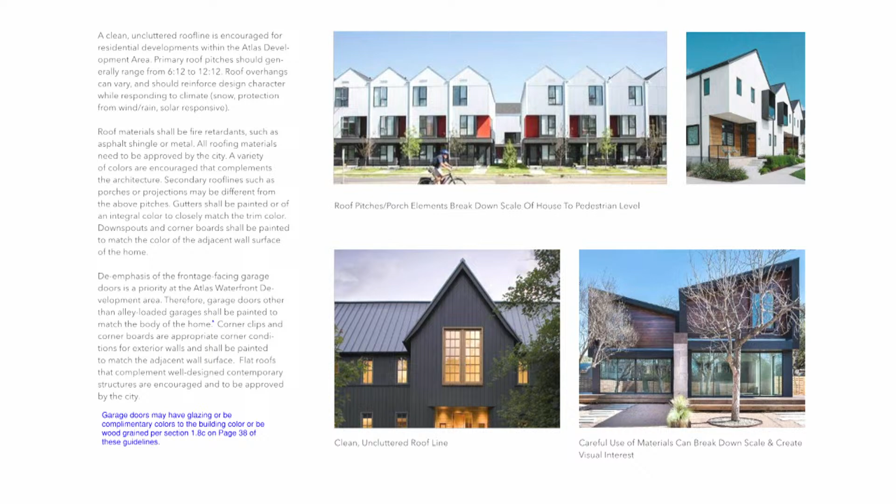On the screen you will see in blue text the suggested modifications to the design guidelines. The first slide, at the bottom left, says garage doors may have glazing or be complementary colors to the building color or be wood grain per section 1.8C on page 38 of these guidelines. The second slide in blue shows the additions: therefore, garage doors other than alley-loaded garage doors shall be painted to match the body of the home, or painted an approved complementary color, or be a wood grain as approved by the ADRC. And finally, garage doors with windows are subject to ADRC approval; windows shall be less than 25% of the surface area of the garage door. So those are the modifications that are suggested.

Everybody agrees with those. They think it will add value to the overall project if those variances are included. Happy to answer any questions you have.

Seeing no questions... one quick question: will this change apply to all the rest of the developments in the district, or only the ones who currently requested this? It applies to the entire Atlas project area. Thanks. Any other questions, comments?

Need a motion? Yes. I would move to approve the modification to the architectural design guidelines as presented to us this evening. Second. Moved and seconded. Any discussion? All in favor? Aye. Any opposed? Thank you. That motion carries. Thank you, Mr. Chairman.

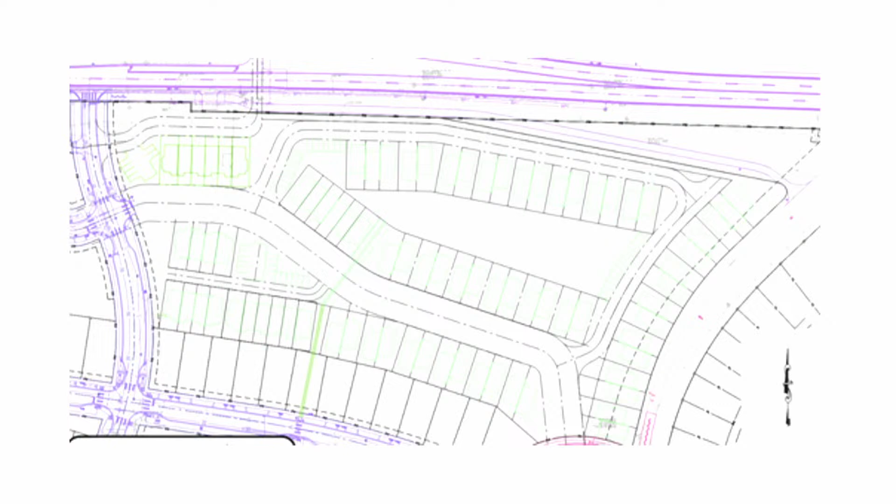After evaluating the different options, it was determined that the Atlas Road borrow backhaul site was the preferred option. Ignite asked the city to allow Ignite to borrow 75,000 cubic yards of structural soils from the city parcel and to backhaul about 60,000 cubic yards of non-structural phase 3 materials to fill in the excavation created by the structural soil haul-off. As part of the Ignite City ITD partnership on this project, Ignite's contractor would finish grade the site to ITD's desired swale configuration.

Following additional work with the city and ITD on this proposed initiative, the quantity of borrowed structural fill from the Atlas site has decreased to approximately 64,000 cubic yards, and the backhaul of non-structural fill material from the phase 3 site has decreased to approximately 20,000 cubic yards.

That's a huge drop in what we can take to the Atlas site now, thus necessitating a strategy of blending some portions of the phase 3 materials with the Atlas Road borrowed structural fill materials to produce structural fill materials on the phase 3 site. So we'll bring in some of the good stuff, we'll kind of mix it with some of the better bad stuff to create buildable materials on the site.

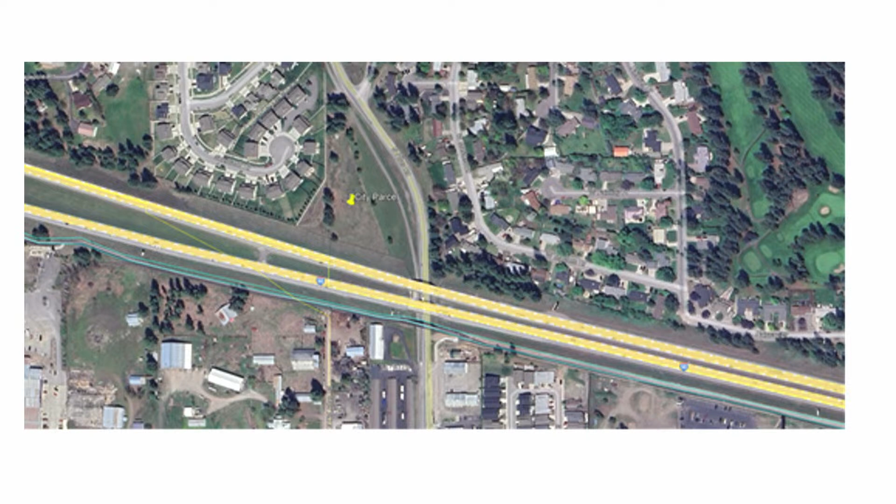Mr. Boyd will share in more detail about how that will work later.

Working with Welch-Comer, Ignite evaluated options for either bidding out this borrow backhaul project or negotiating a change order to La Riviere's existing Atlas project contract. Bidding the project out would allow Ignite to receive definitive construction market pricing, but would require detailed engineering bid documents and a longer project schedule.

Even though negotiating a change order with Lariviere does not directly confirm market rates, it does require only permit-level engineering documents and can be completed in a shorter time frame.

The proposed negotiated Atlas Road borrow backhaul contract with Lariviere has resulted in a total cost of $16 per cubic yard, which includes a material blending strategy and all pertinent costs like traffic control. This initiative is still very cost-effective for Ignite, since buying structural fill in the open market and placing compacted on the site would cost in the $30 cubic yard range. So $16 versus $30 per yard.

The following table on the screen summarizes the two options. You can see the bid item here, and then comparing if you bid it out versus a change order with Lariviere.

You can go down and see the different time frames, estimated construction time periods, the cost for design, construction documents, bidding, negotiation phase, construction phase services, and construction costs. There's a range there because that's just about the best the Welch-Comer team could come up with for what it would cost on the open market. And you can see the estimated costs there.

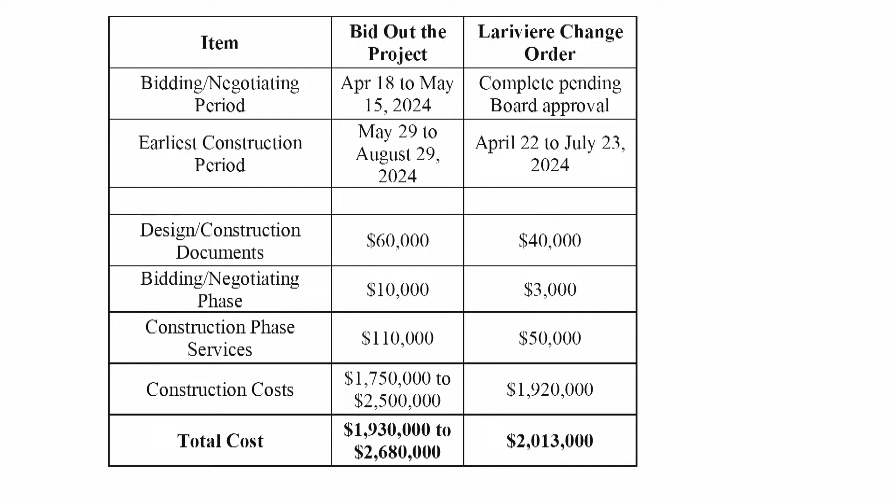Should the board elect to move forward with the Atlas Road Borrow Backhaul Initiative as proposed, a change order number 6 would be needed to the La Riviere Atlas project contract. La Riviere would be given a notice to proceed on April 22nd with a substantial completion date of July 2024.

So the La Riviere change order number 6, CO number 6, equates to about $1.9 million. You can see on the screen it involves hauling approximately 64,000 cubic yards of structural soils from the Atlas Road borrow site to the Phase 3 site, backhauling approximately 20,000 cubic yards of non-structural Phase 3 soils to the Atlas Road site, blending approximately 30,000 cubic yards of Phase 3 non-structural soils with Atlas structural soils, and remediating 10,000 cubic yards of Phase 3 unconsolidated structural soils to the consolidated condition.

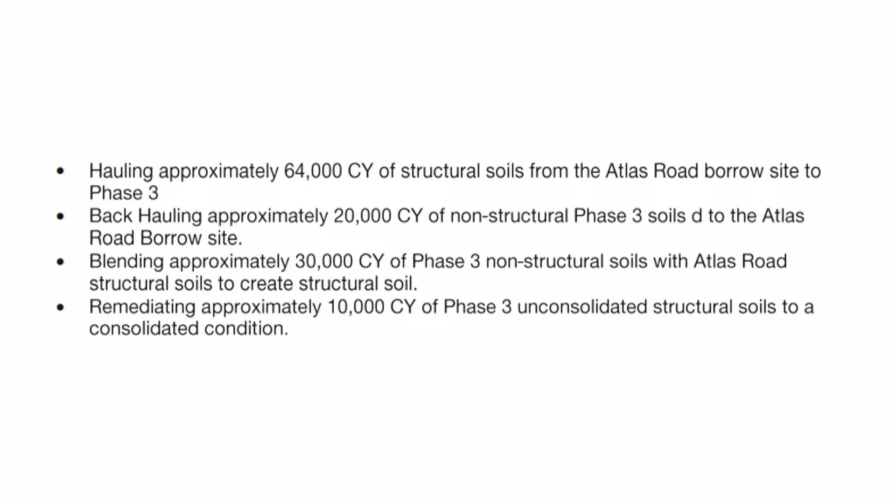So I'm going to invite Mr...

Boyd steps up to walk through this more complicated table to explain some of the vast elements involved with this change order number 6. Thank you, Tony, Chairman Hoskins, and board members.

As Tony has nicely summarized, this has turned into a relatively complex process, which is why you see so many pay items up here.

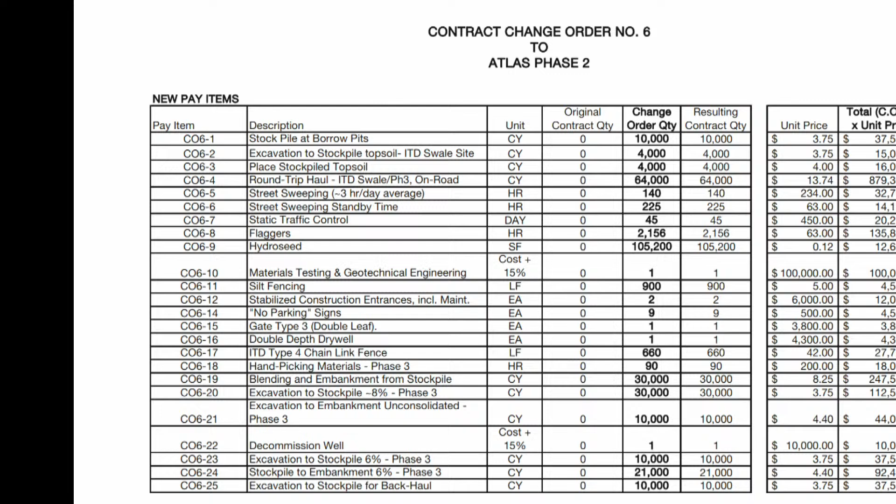To give you a general idea of how an earthwork project like this moves forward, we've gone through and, to the best of our abilities, estimated quantities of materials we anticipate moving, taking from Atlas and blending and doing those things. But we don't know exactly what that will entail because we don't have a complete picture of what Phase 3 looks like. We have a pretty good estimate, but it's not a complete picture.

So the way you mitigate risk to both the owner, Ignite, and the contractor is you develop a unit pricing contract, and then you have an agreed upon method to measure and pay those items. That's why you see so many pay items here.

One of the things Tony mentioned is originally we had intended to do this project very... efficiently. So we were going to go over to the Atlas site, haul a bunch of structural soils from there, 75,000 yards, and then take back 60,000 yards of non-structural.

When ITD became involved, the limitations they put on that site—which we can talk for an hour about if you'd like, because it's part of a federal highway system and it's not necessarily their choosing, it's just the world they live in—really narrowed the lane with what we would be able to do over there, because their testing requirements for material we haul there are very high, and how the site is designed is very restrictive.

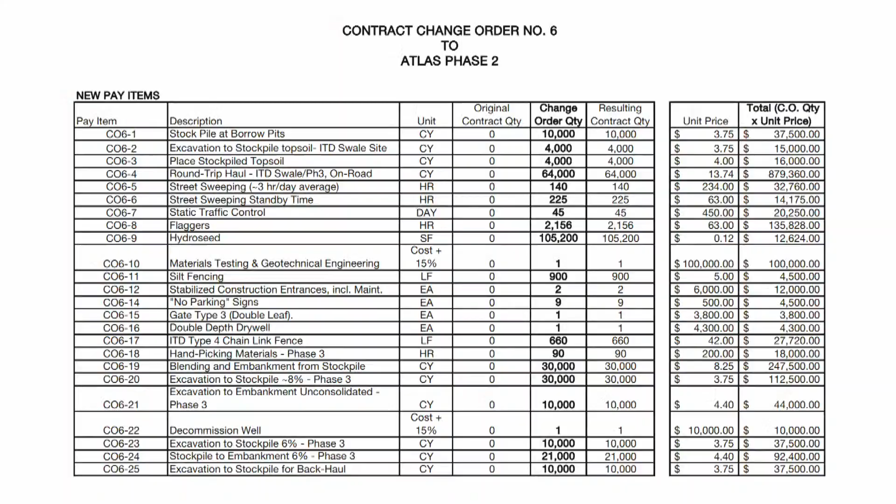I'm going to kind of quickly switch to this other presentation. Let me pop this up real quick.

The problem with them is they have over-optimum moisture in them, so you can't easily work them, and they have maybe slightly higher organics than what the geotech will allow. As we haul material in from Atlas, through an additional process, we can take a little bit of the Phase 3 material, a little bit of the Atlas Road material, and blend it together—that was our attempt to add value to that.

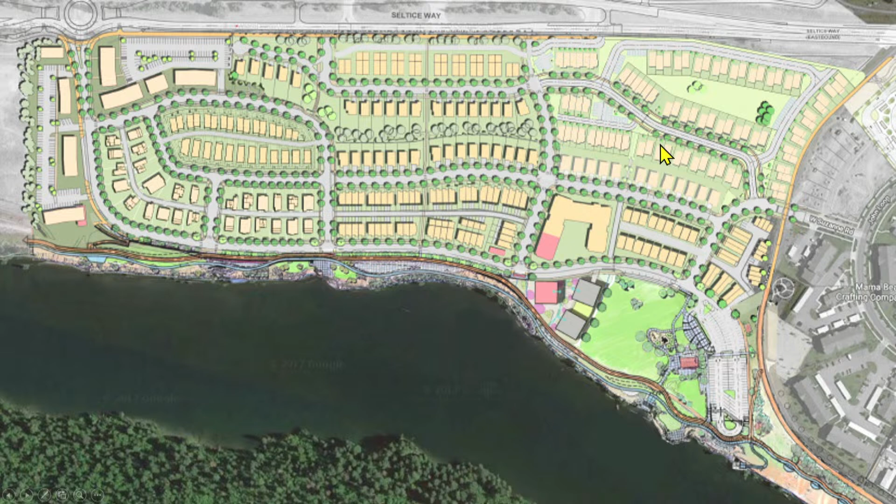But we're not doing a lot of hauling back non-structural soils into it.

Do we know that the soil at the Atlas Road site is all good soil? Yes, because there were borings, there was a water well the city had constructed as a test well, so we have the soil logs from there, and ITD had soil data that we looked at as well. So it's low moisture, granular soils, which is just what we need. It might be too low moisture, but we have lots of high moisture soils at our site.

Another question: the date shown was that the project finishes July 23rd, but the city wants the bike trail complete and patched by July 1st. They would like the trail open to the public by July 1st. Any patching or damage fixed? Yes, it needs to be usable by the public by July 1st. The July 23rd date shown is for the entire project to be complete, but we could complete the trail within that July 1 window if that's a requirement.

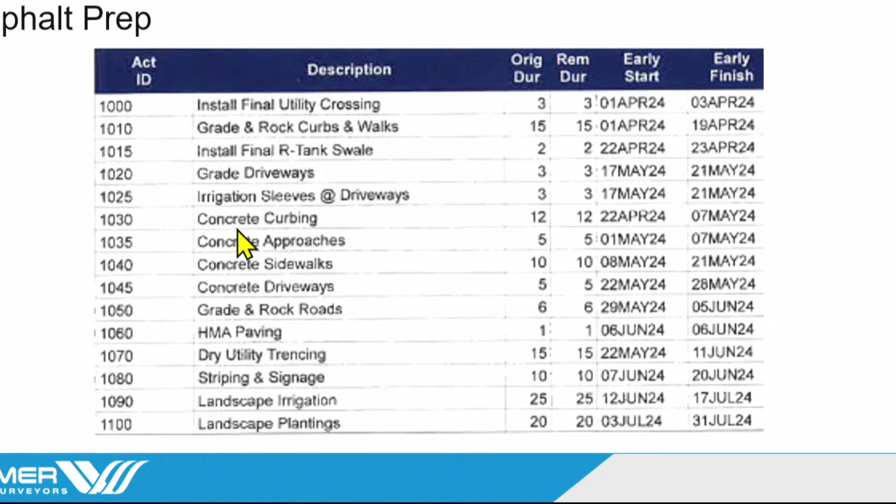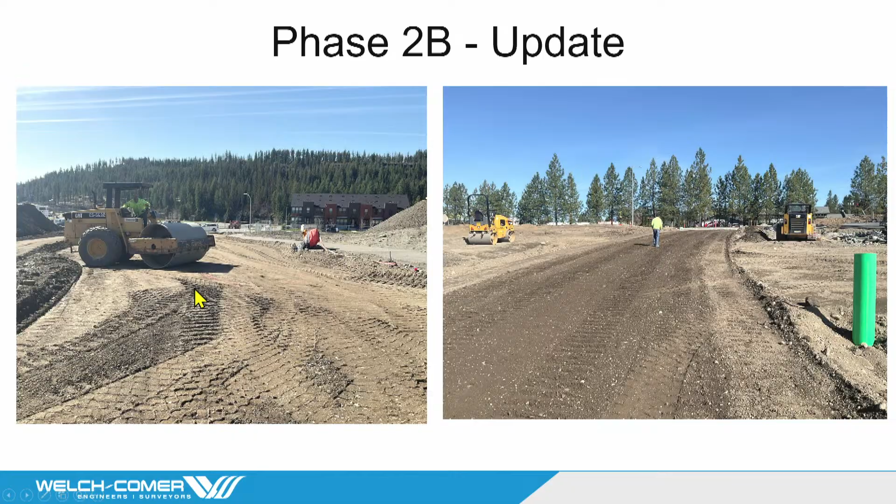Just a couple of snapshots here. This is kind of what the site looks like now, and that's been the primary work going on out there. This will still be developed, but we're doing some other things on this side. This will allow all of his trucks to enter and exit right here, and all the operations will stay east of that, with Hartwood here.

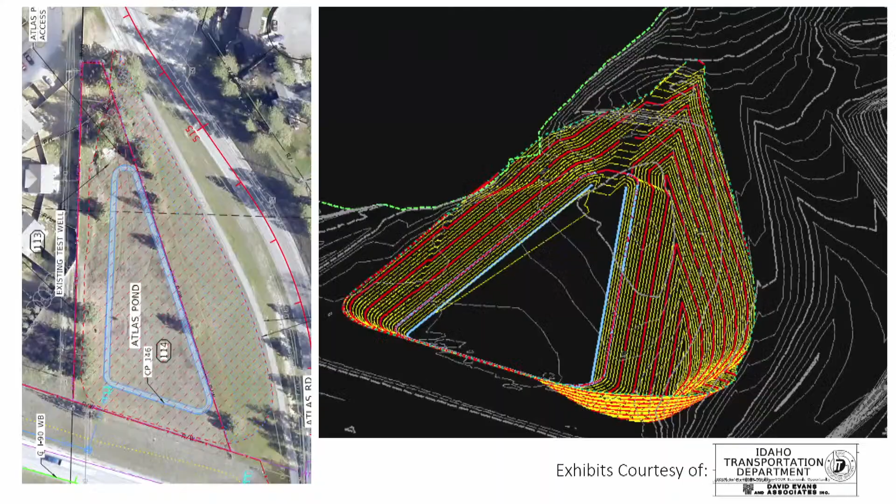So because of the traffic flow there, are they going to have to go out, turn right, then go down and turn back? Yes, that was one excerpt from the traffic control plan I didn't include here, but yes, there'll be flaggers here and on the other side. When a vehicle starts to exit, the flaggers will stop traffic in both directions and the trucks can move through. Without getting too into the details, that's the other thing you end up negotiating with the contractor: cycle times. He comes up with a cycle time, I come up with a cycle time, and of course my cycle time is always lower than his, but I don't account for car accidents and rock chips and things like that. So we work through those things, agree upon a traffic control plan, negotiate cycle times, and arrive at numbers for the unit pricing.

Follow-up question, Phil: on the graphic you have up there, it looks like the Centennial Trail is continuing along the side of Seltice with a piece yet to be completed. Is that part of the HMA paving timeframe you were referencing in the previous schedule? I guess what I'm thinking about is the ped bike trail linkages, because we're going to take out a link up on Atlas.

Thinking about what the reroutes and detours are, because there's 3 weeks where kids are out of school and there's activity on the trail. I appreciate the city's discussion of July 1st, but just trying to think about route finding and ways to make that easier. Yeah, this won't happen before, it might happen during the paving that is in Phase 2B, which was sometime in June.

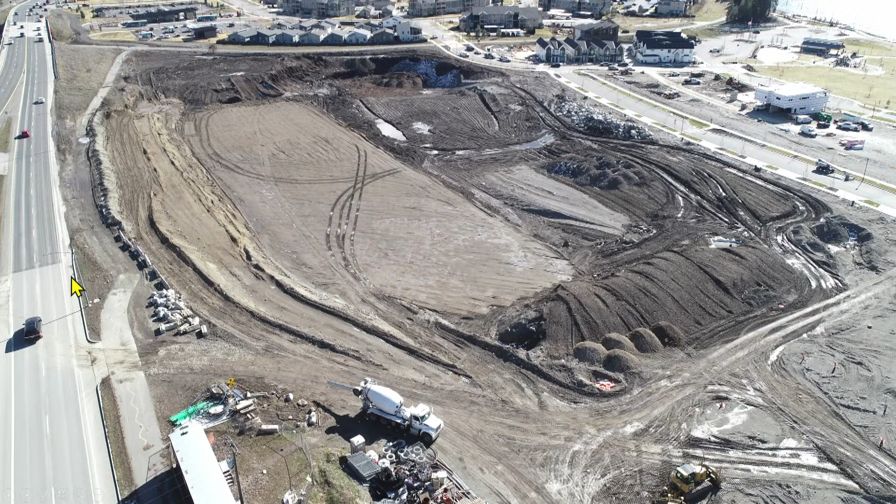You can see this big pile of soil was the fall protection from the trail through here, because people still use the trail. It's rugged, there's no question, but it's still usable. And if I recall correctly, the profile still has a bike lane on the street, so there is passage for ped and bike activity. Good point, correct. And the trail is on the north side too.

Dan? One follow-up question on the backfill project and the path - I think I saw an email today. Last night at our council meeting, I think the idea was it would be totally shut down for whatever period of time, but then I thought I saw something today where maybe there would be a way to safely still have some bike trail traffic.

There is, Commissioner English. This is the traffic control plan, and you see the two flaggers right there. The entrance and exit on the Atlas Road site will come right through here. We have planned to put temporary fence along the western edge of the trail and flaggers here, so if someone comes along the trail, they could stop them when the truck is crossing, and then let them go. So we have currently planned for the trail to be open as part of this process.

Ignite is paying more for that. Well, then we should take advantage. Yeah, so just to be clear, some of that came out of our pre-permit discussions with city staff, who were anticipating what council might come up with or what the requirement might be. So we just decided to put it in and leave the trail open.